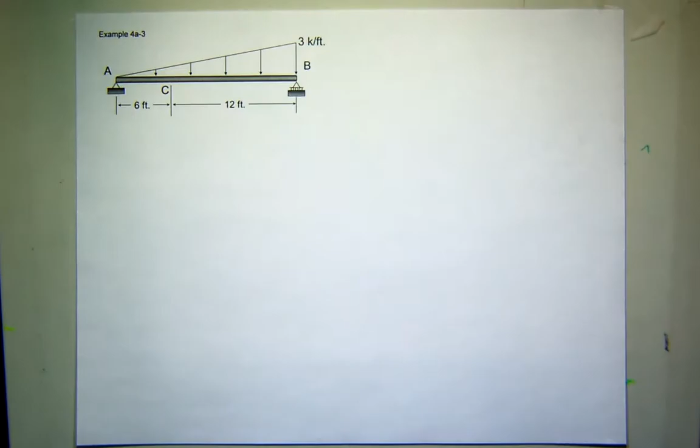Okay, let's look at this problem. What I have is a simple supported beam. I want to find the internal forces at C, but I have this triangularly distributed load, so I'm going to cut the structure at C. That's what the problem's asking for.

Let's look at a left side or a right side and try to make a choice. In terms of reactions, it's a wash, right? Because you have to find a reaction for A if you do the left side, or a reaction at B for the right side. So no obvious advantage yet.

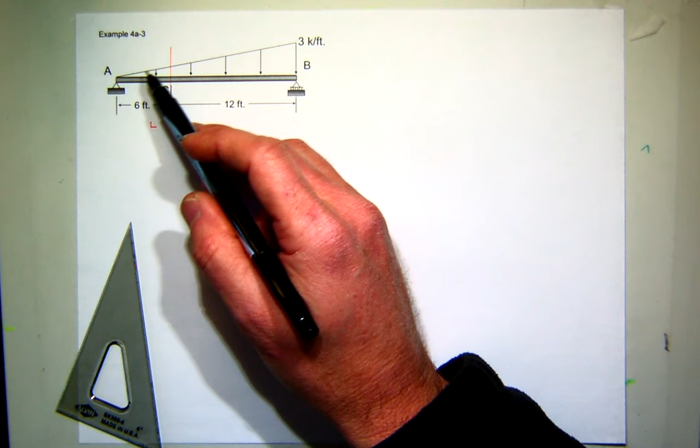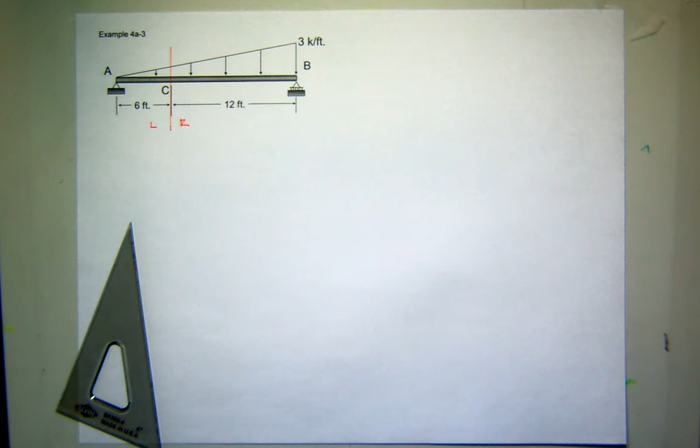What's the shape of the loading on the left-hand side? It's a triangle. What's the shape on the right-hand side? It's a trapezoid. Ouch. I don't remember the centroid of a trapezoid off the top of my head. I know the area, that's easy, but not the centroid. So what most people do is cut it up into a rectangle and a triangle, and you'd have to deal with two concentrated equivalent forces. Not undoable, but more challenging than a single force on the left-hand side. Does everybody see that?

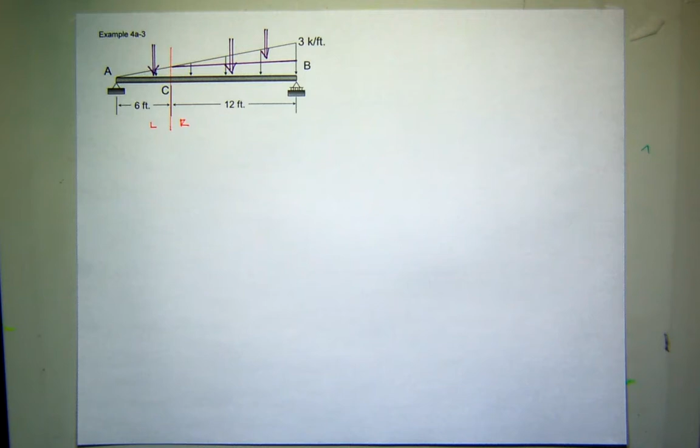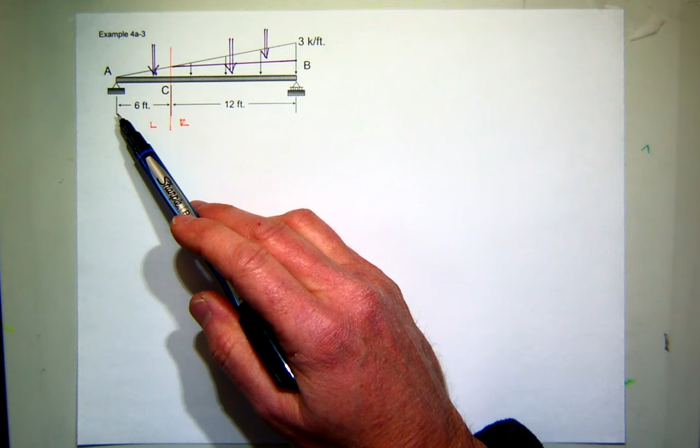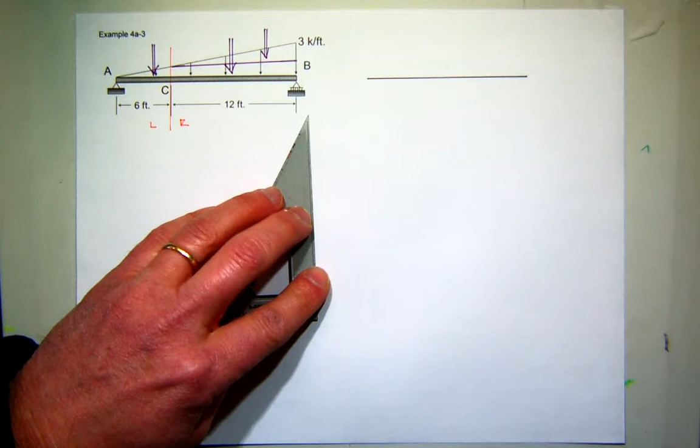So the best strategy would be to go to the triangular loading section and do the left-hand side. To do that, I just need to find the reaction at A. Since I fouled this diagram up with discussion, I'm going to redraw it. I'll draw a free body diagram and assume a reaction at AY and BY. Technically this is a pin, so I'll have a reaction force in the X direction.

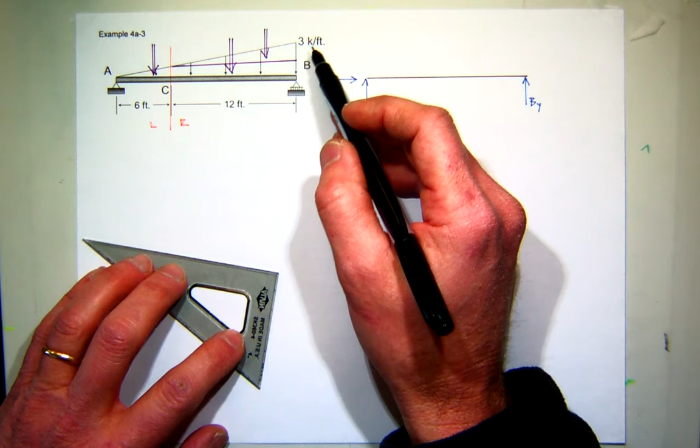Now I'm going to find the concentrated equivalent force of this large triangular force. Remember, the area of a triangle is 1/2 base times height. The base is 18, height is 3, so that's 27, the area under the curve. So the equivalent force has a value of 27 kips. Where's the centroid of a triangle? 12 feet from A. The way I remember it is 1/3 from the big end.

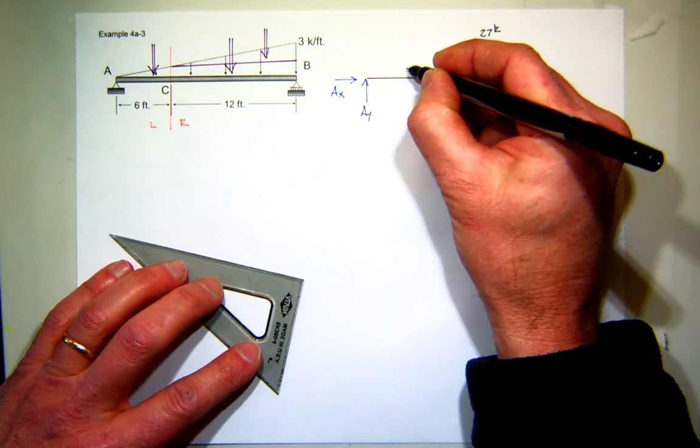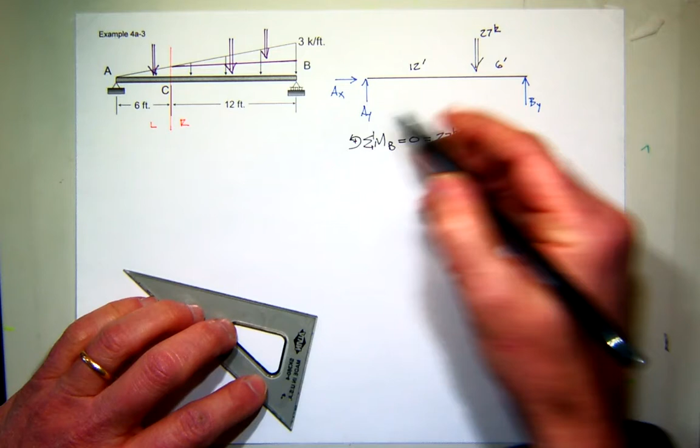So 1/3 from the big end would be 6 feet on this side and 12 feet on that side. With that done, and since I want A, I'll sum the moments at B to make sure I have equilibrium. Using right-hand rule, the 27 kip force creates a positive moment about B, with a moment arm of 6. My reaction creates a negative moment with a moment arm of 18. So it looks like AY is equal to 9.

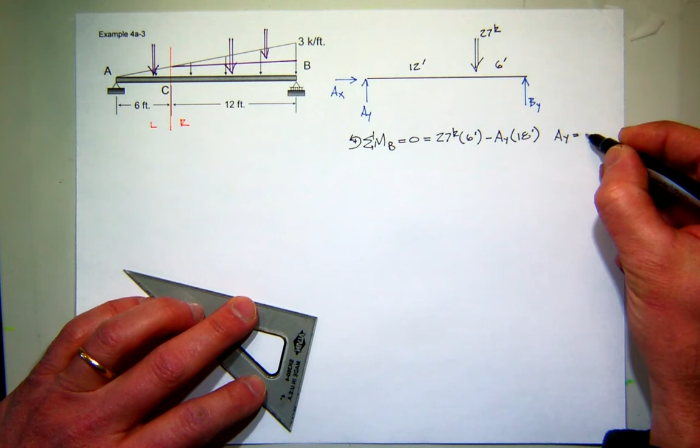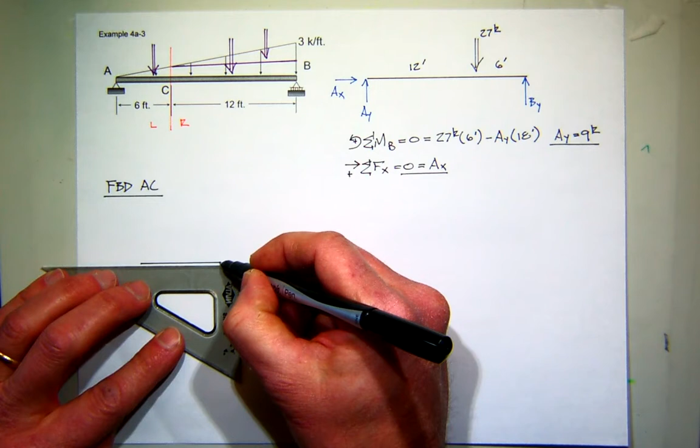So now I want to come down and draw my free body diagram for AC. Let's see what we've got. I'll try to draw this a little bit bigger. So I have my AY reaction, which is 9 kips, at a length of 6 feet. And then I've got this triangular load.

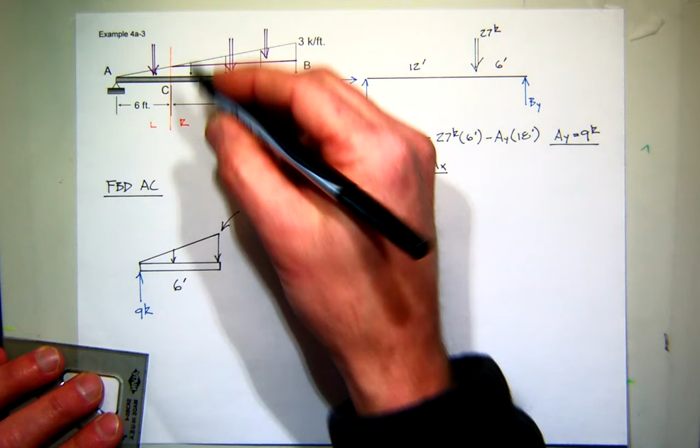What's the intensity of the load here? If it's 3 kips per foot all the way out at the end, it behaves linearly, so what would be the height of the load here? 1 kip per foot. It's similar triangles: this height is to 6 as 3 is to 18. You guys see that? So this should be 1 kip per foot.

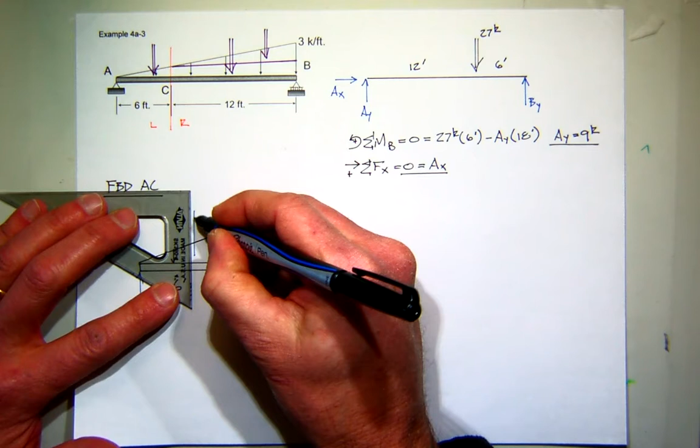So that means the concentrated equivalent force would be 1/2 base times height, which is 3. And the distance from the big end is 1/3 the distance, or 2 feet. Then all I have to do is remember my sign conventions: positive shear, positive axial force, positive bending moment. And I'm 60% done.

How did you know it was 1 kip per foot? If you look at the load, I know it's 3 kips per foot on the end at a distance of 18 feet, and it's linear. So if I come over here, I don't know what the height is there, but I know this is 6 feet. Then similar triangles say the unknown value is to 6 as 3 is to 18. What's 3 divided by 18? That's 1/6. So what should the question mark be? 1.

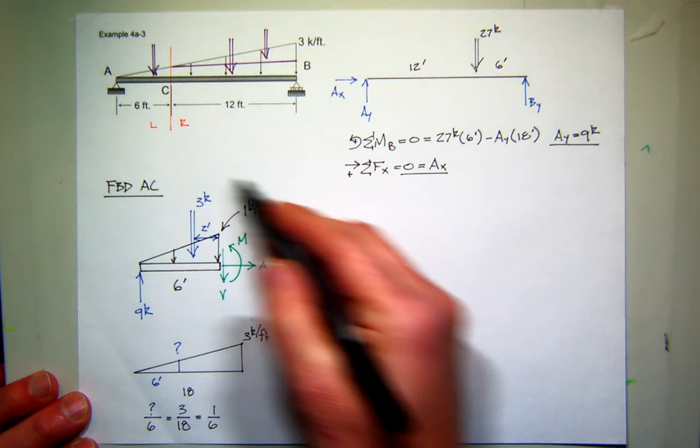So all I'll do is finish this, just apply my mechanics. I'm going to sum moments about the cut, making sure it's in equilibrium. Again using right-hand rule, this bending moment is a positive moment. The moment caused by the concentrated equivalent force, 3 kips, creates a positive moment about the cut with a moment arm of 2 feet. The reaction force creates a negative moment with a moment arm of 6. So it looks like the moment in this structure is positive 54 minus 6 is 48.

Does that sound right? And it's positive, right Mr. Abney? Positive moment. Yes, sir. Do you like that? I do like that. Because how's this beam going to bend? Like a smiley face. Like a smiley face.

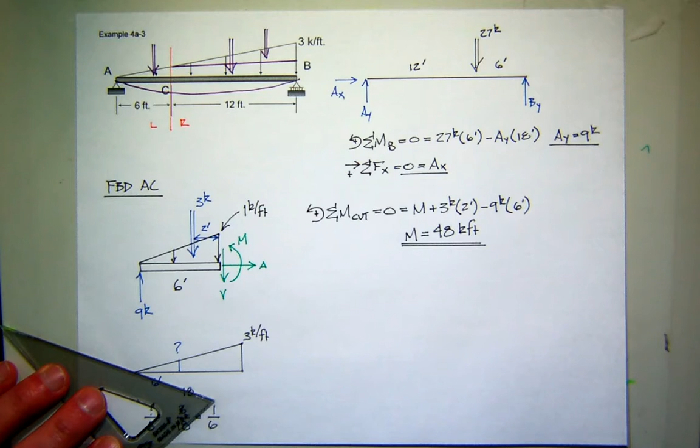Excellent. One more thing to do? That would be like a smurf. A smurf? A smirk. I was going to say that would be okay. Most smurfs are happy and smiling all the time, right? So it could be a smurf too, I think. I don't remember the Smurfs. You guys remember the Smurfs? If they were green, they would die, if they were blue. Well, those movies that came out recently were a little bizarre. They weren't quite Smurfy for me. It's not the way I remember the Smurfs. They're a little too modern, I think. That's not important to this problem, I don't think.

So, summing forces in the y direction, assuming up is positive, I have a shear force V down, my 3 kip force down, and my 9 kip reaction up. So shear is equal to 6. And we're done. Any questions about that? All right.